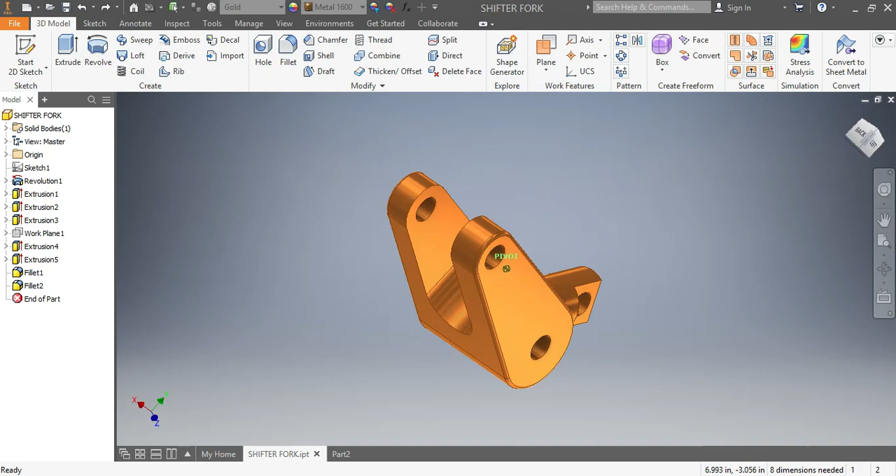Today you're going to have to draw this shifter fork that you are seeing in front of you. Our dimensions are in inches.

What I'm going to do is go on New, come to English standard inches, and go to Create. Don't worry about this message, I've been going through it a lot.

Then I'm going to start with some lines for guidance. I'm going to choose a drawing plane that is YZ. So once I'm in here, I'll put that one there. This is my drawing plane, my line for guidance.

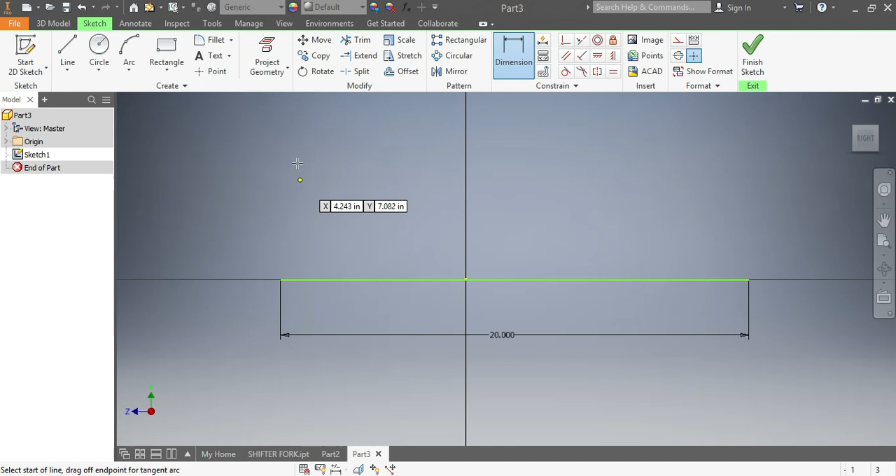I want this one here to be let's say 20 inches. Don't worry about those dimensions though, but they're going to help me a lot anyway. Then I'm going to go for the other line. Okay, that is my line.

The next thing that I want, I need this line here to be 45 degrees above this horizontal line. So that needs to be 45 degrees.

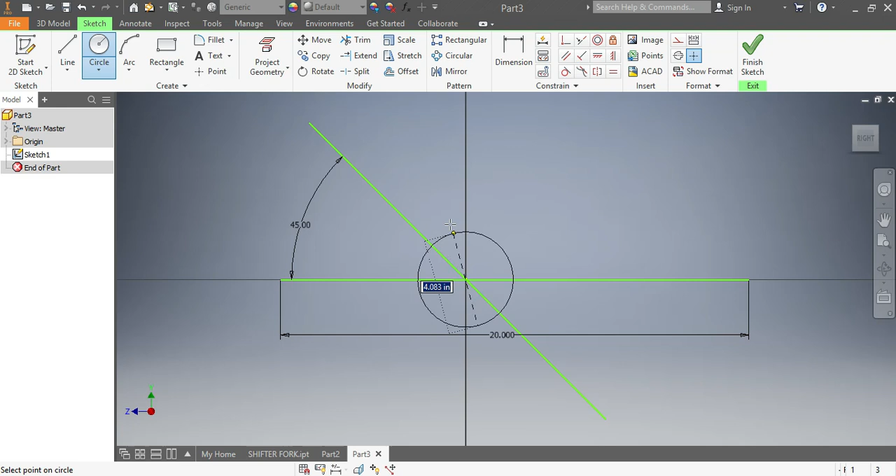Once I have that in place, I'm going to go for circles. So that's my first one. This is my second, that's my third. And then I'm going to come on this side as well.

1 and 2. So I want from here up to here to be, as per my sketch, 6.5 inches. And again I want this one here to be 2 inches.

That needs to be 2 inches, and this one needs to be 1 inch. This side as well, so that one needs to be 1 inch. The following one needs to be 1.5 inches, and the third one needs to be

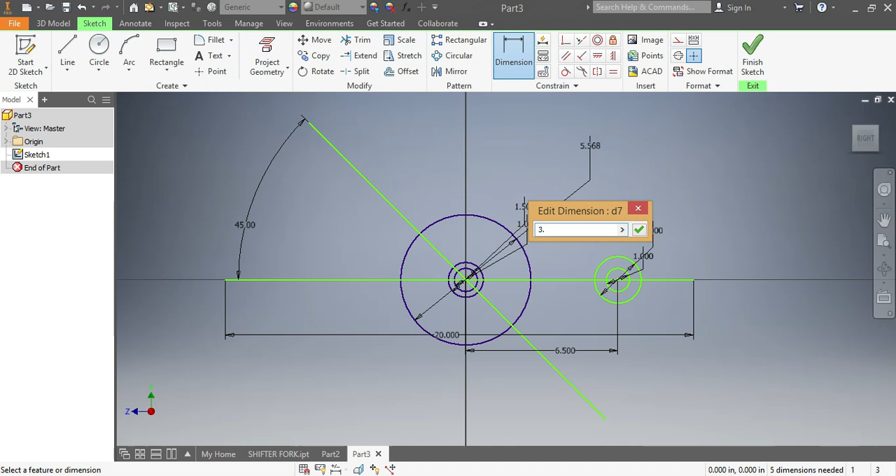3.5 inches. So after this I'm going to go for these lines here. So that is my first line, and this is my second line.

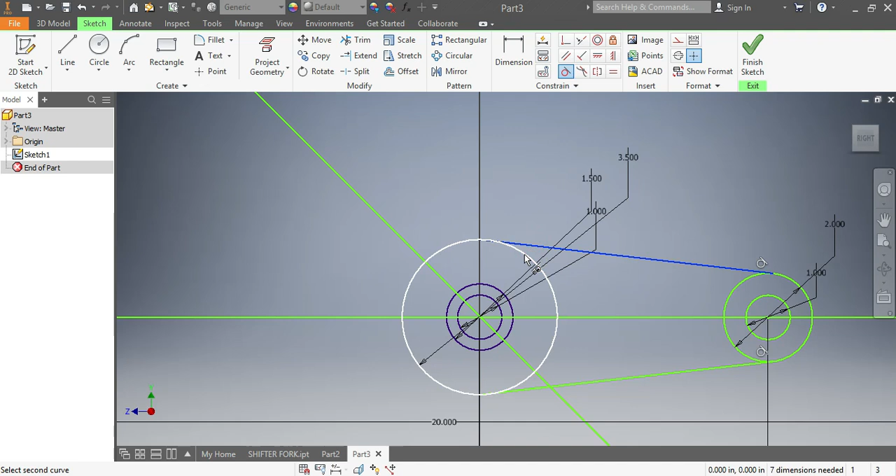Now I want this line to be tangent to that one. This line needs to be tangent to that one. That needs to be tangent to that one, and those need to be tangent to that one.

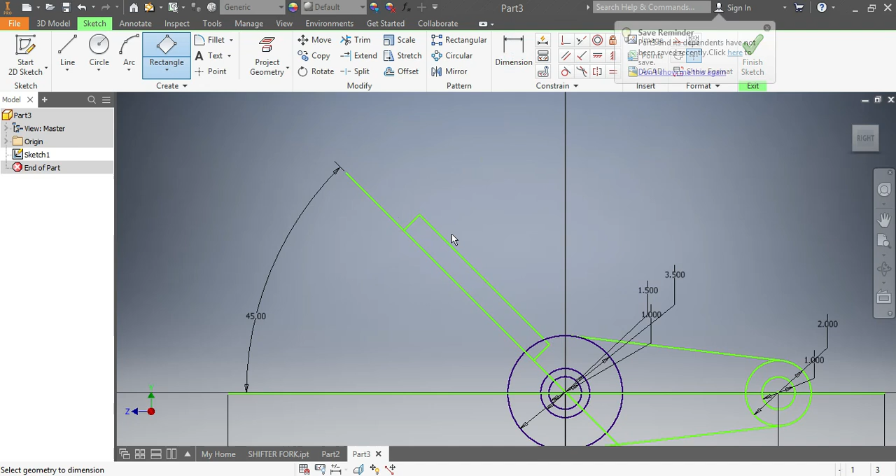Once I'm satisfied with that, I'm going to come here and choose a rectangle. So that rectangle will be fine for me. The rectangle needs to go from there up to here. There is my rectangle, and I want this rectangle, from there up to there, to be 1 inch.

That is 1 inch. It's fine there. And I want now from there up to here to be... I can give it 3.8 inches, as long as it's about this, the circle there, with 3 inches. That's all I want.

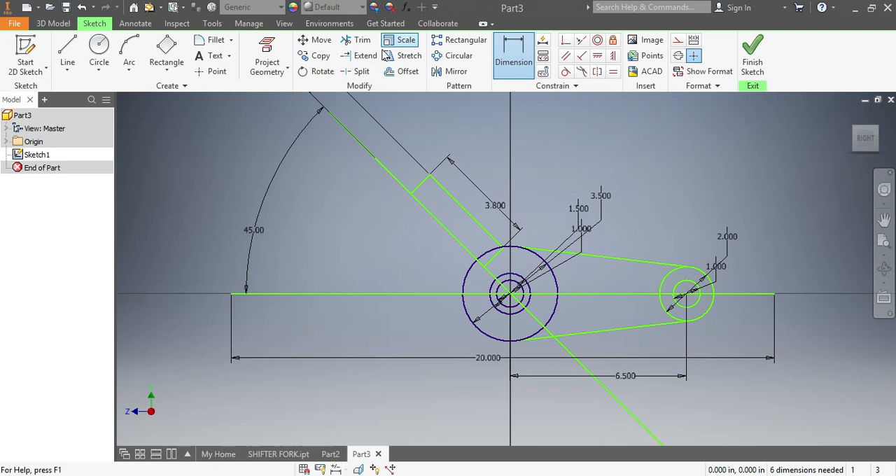Then I go for Trim to remove all the parts that I don't need on my sketch. So I'm going to remove that part, remove this one here, remove that one, remove that one, remove this one. Once I'm done with those, I'm going to go for the 3D model.

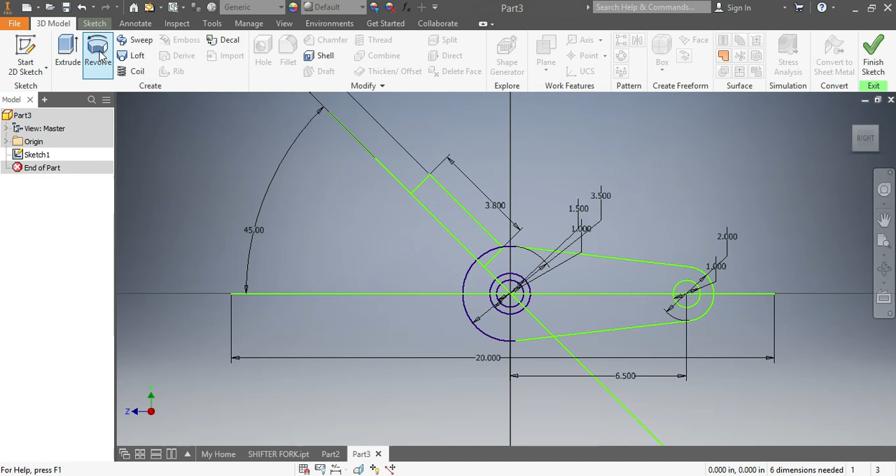I think that's it. I'm going to go for a 3D model, I'm going to go with Revolve. So here I want to revolve this part against this axis. Then I say okay, then I come again and go to Revolve there.

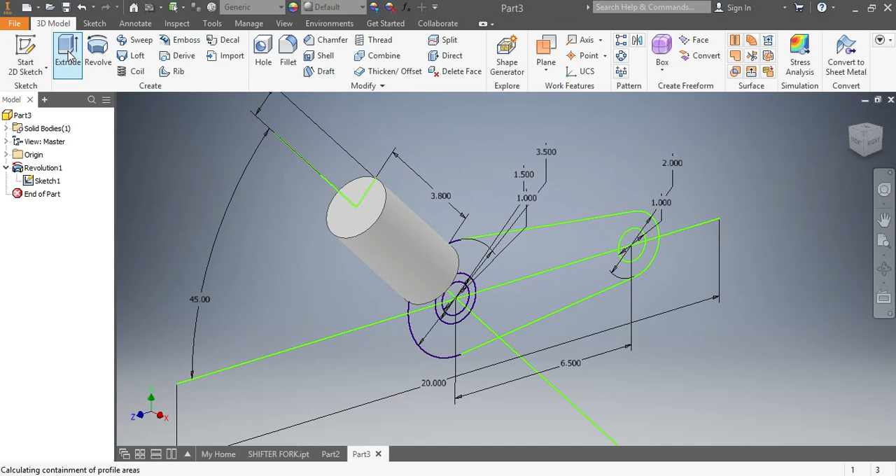I save, sketch visibility on. Once the visibility is on, I need to give dimensions like you can see there. So I come back here again, I go on 3D Model, I say Extrude. I'm going to extrude this part here according to my sketch by 4.

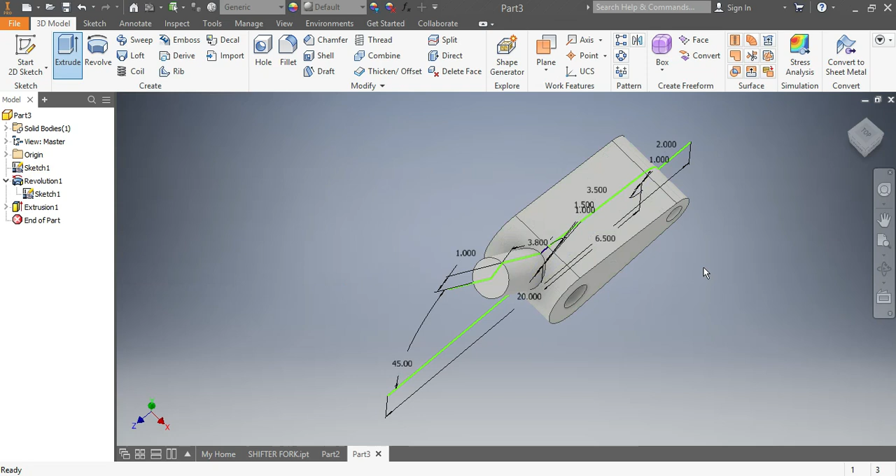It's 4 point what? 4.5. So that needs to be 4.5, but both sides, like that, both sides of that line. Then I say okay. So once I have that one, I'm going to come here again and say extrude again.

I'm going to extrude this part inside here. If you see properly here, you can see that there's a step there, that step that you're seeing there. Then I'm going to make sure that I have it on this side as well.

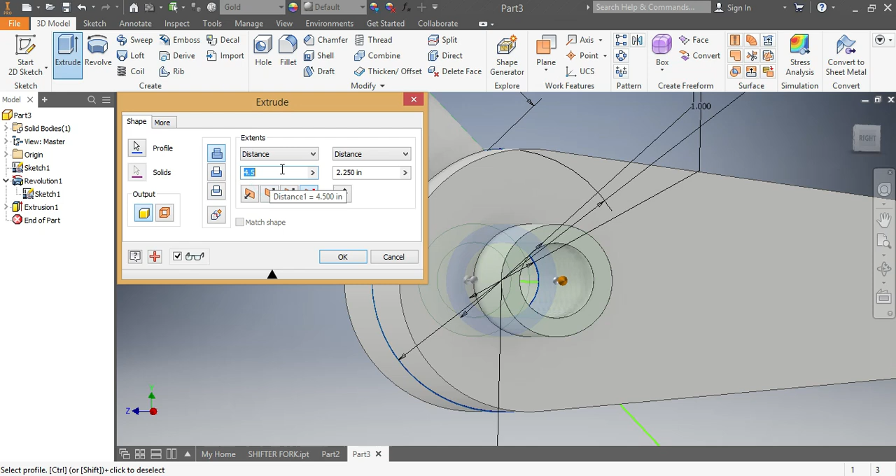So I'll come here, then that is fine with me, but this side is the one that I need to work on. So there, come on. So that one needs to be 1.65. That's it, yeah, 65, that's all I needed. Then I say okay, like that.

Alright, the next step that I need now, I'm going to come up here, check here, I'm going to come there, click on it, say New Sketch. So once I'm here, I'll come with a rectangle. Okay, I need a rectangle. So there is my rectangle.

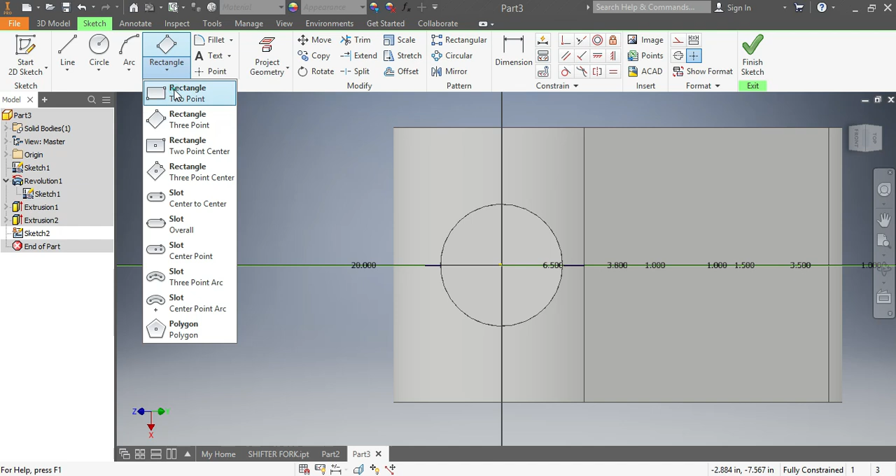Then I want this rectangle to come like this. So there is my rectangle, alright? And this one here, I need it to be, to avoid confusion, that needs to be 2 inches. And since 2 inches from there up to there, that needs to be 1 inch.

Okay, I think something moved there, but it's not a big issue, so that is fine with me. And then I'll come here and draw this rectangle.

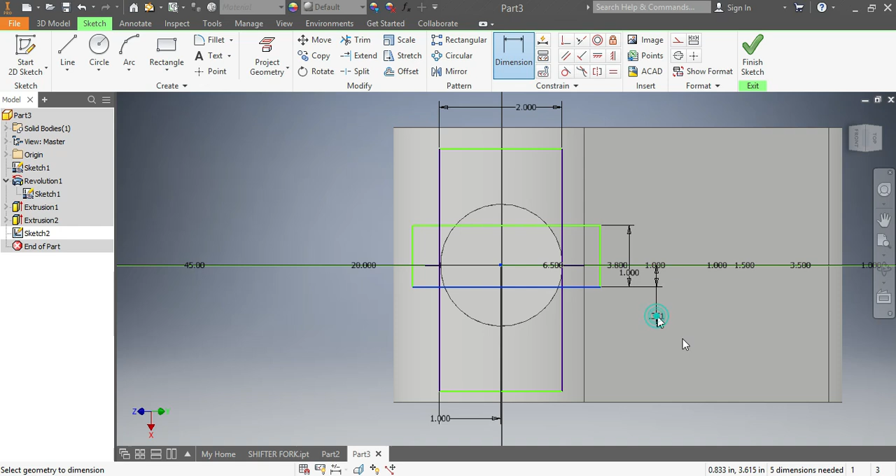So as per this rectangle, that one needs to be 1 inch, and from there up to there, it needs to be 0.5 inch. Okay, once I'm satisfied with that, I'm gonna come here and trim the spot here, that and that, this and that. I can just delete that one.

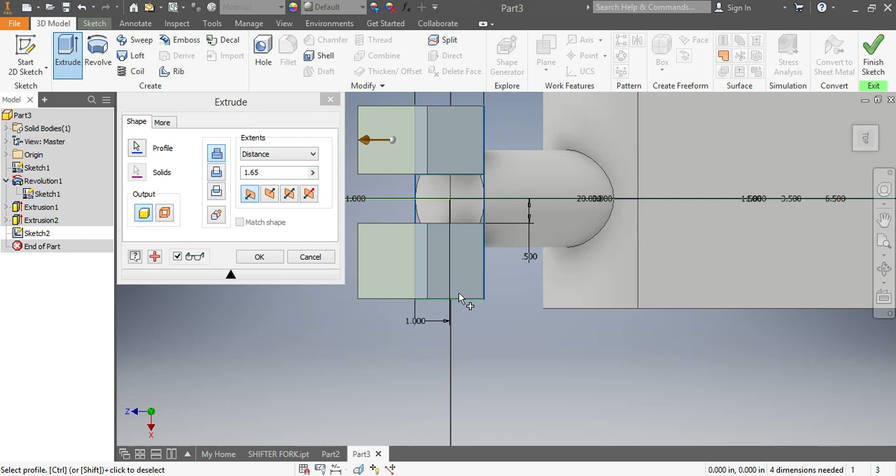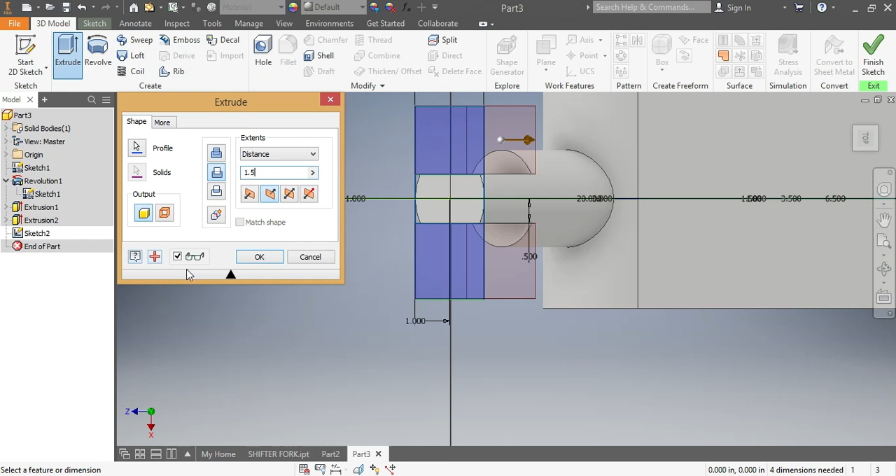Then I'm gonna go for a 3D model, I say extrude. I want to cut the spot here and that spot there so it can go down. I want to cut it according to my sketch by... 0.75. Okay, no, I made a mistake. That's not 0.75, it needs to be 1.5. Sorry, 1.5, alright, then I say okay. So that is done there.

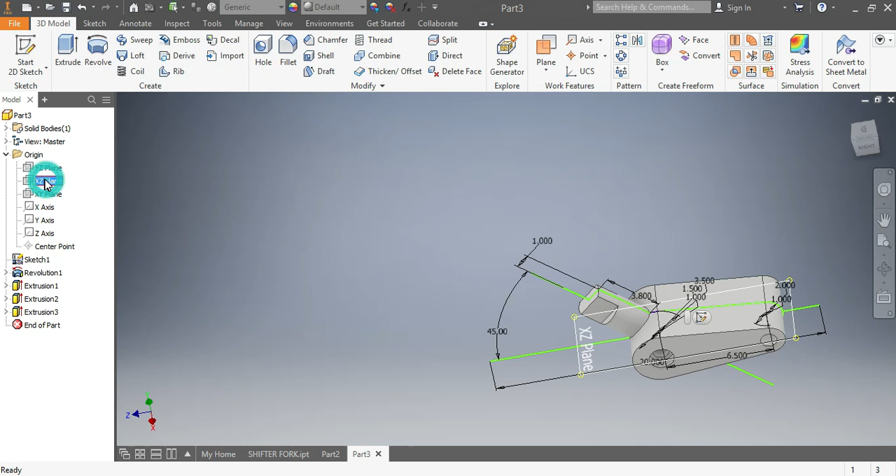Okay, the next thing that I need is this spot here. So I'm gonna come back here. This needs to be done on which plane? So it's xz, sorry. I'm gonna click on xz there, then I go on plane. I try to punch it, but I want it to be at 0, so 0.0, so it needs to go back there. I say okay. Then I come there by the corner, I say new sketch. Once it gives me that, I come by the corner again. I say slice graphics.

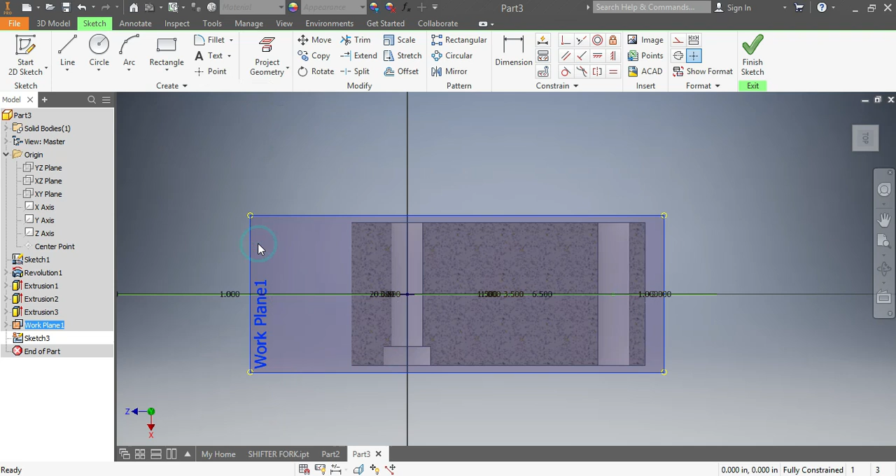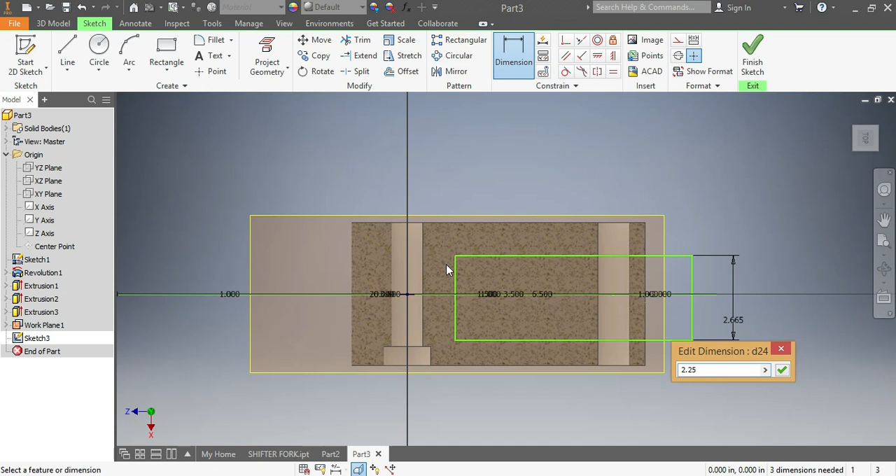Once I have that one there, then I'm gonna start with this. So I'm gonna draw this rectangle here. Doesn't matter how far it can go, but this one here needs to be 2.25, sorry for that, so 2.25, which means...

Sorry for that, from there up to there, that needs to be 1.25, was it? Is it 1.25 or 1.75? 1.175, that is the correct answer. So 1.175, and now according to my drawing, from that spot to there, that needs to be 2.5. So that needs to be 2.5, okay, that needs to be 2.5.

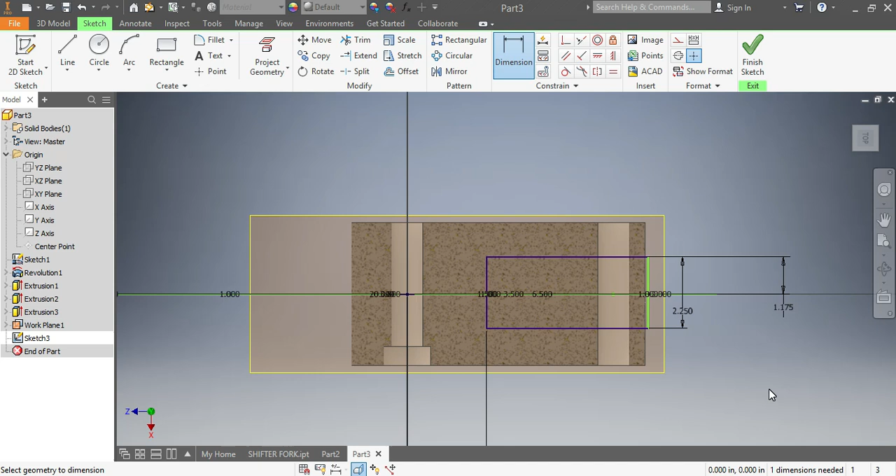Okay, and I'm gonna go and do this. I go there, then I come here. So that's great. I go for escape, and then I trim this spot here, so I trim that spot. So I'm done with that.

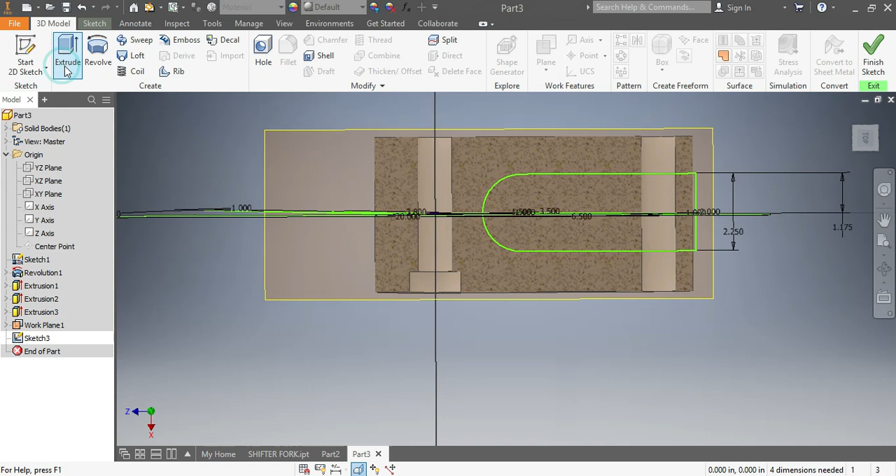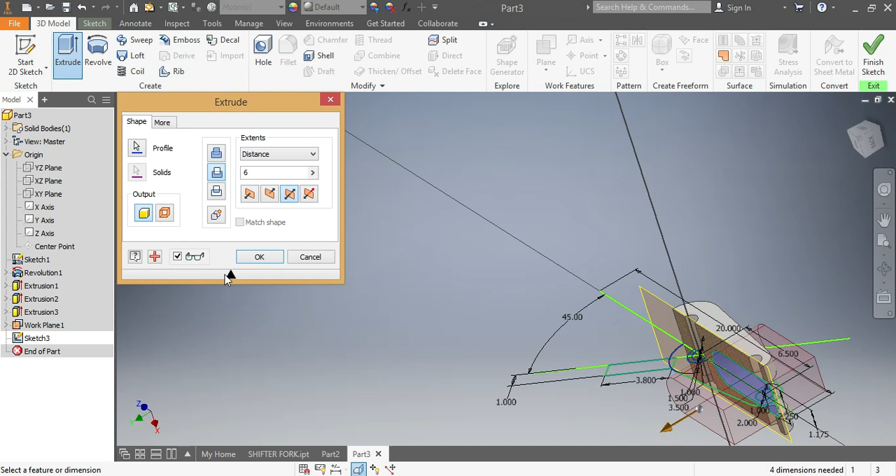Then I'm gonna say 3D model, extrude. So I need to extrude this part here. There we go, check here, like that. So I'm gonna go cut it. I can go as far as I want, I can go with 6 inches, but need to go not only one side but this side as well. So I'm gonna go there and say up and down, then I say okay.

So once that is done, you can see now how my drawing looks like. Okay, so now I need to come here. I can come here and say new sketch. So once I'm there, I'm gonna go for the circle, and the circle here needs to be 1 inch, right? Yeah, the circle needs to be 1 inch. Sorry, the diameter needs to be 1 inch, so that needs to be 1 inch.

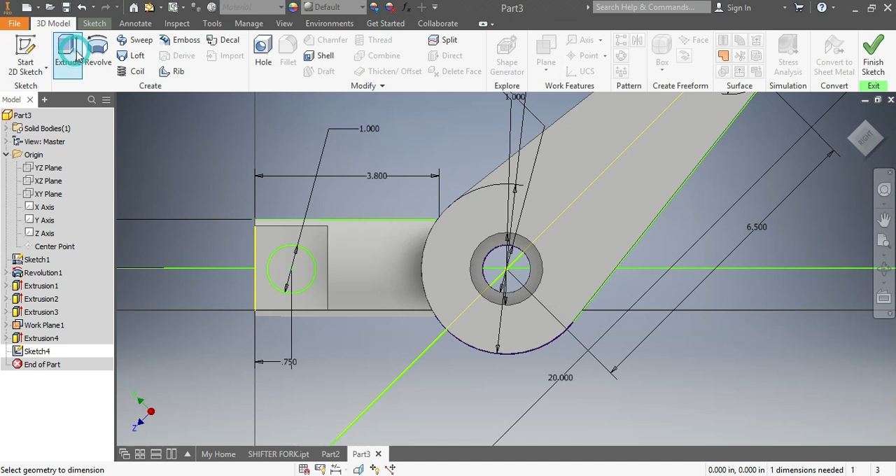Alright, and from there up to there, that needs to be 0.75. Alright, then I go on 3D model, I say extrude. I'm gonna cut that support there. 6 inches is fine for me, so both sides like that. Then I say okay. Alright, then I'll come here to make my drawing look beautiful. I'm gonna say visibility removed, and then I want to remove that drawing plane. Then I'll go here and say visibility off.

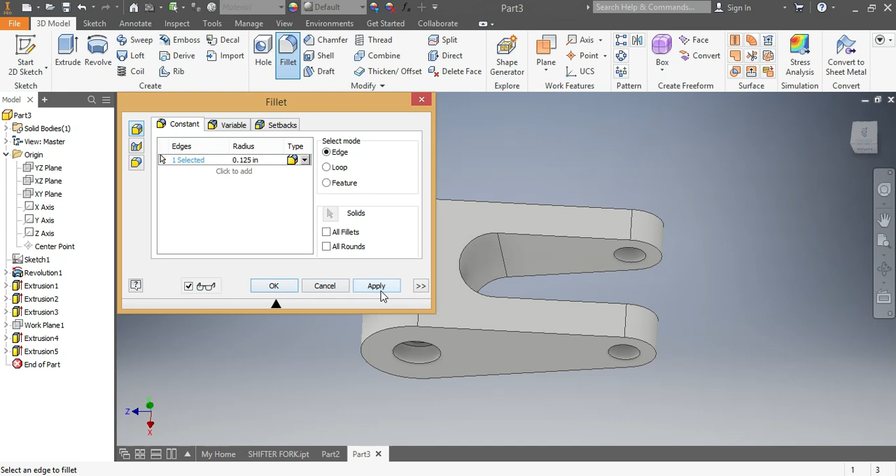Okay, so once that is done, I'm gonna have to fill the corners. Okay, so first I'll start here. I'll click there and then I click on the fillet. So that one is fine for me, 0.125 inches, I'll say apply. Okay, it's applied there already.

Then I'll select that one, press Control, select spot. Okay, I'll try to turn my drawing, select that spot, select this spot as well, turn it again, select that spot, select that spot, select this spot, and then turn it, select this spot here. Then I click on the fillet, then 0.125, fine with me.

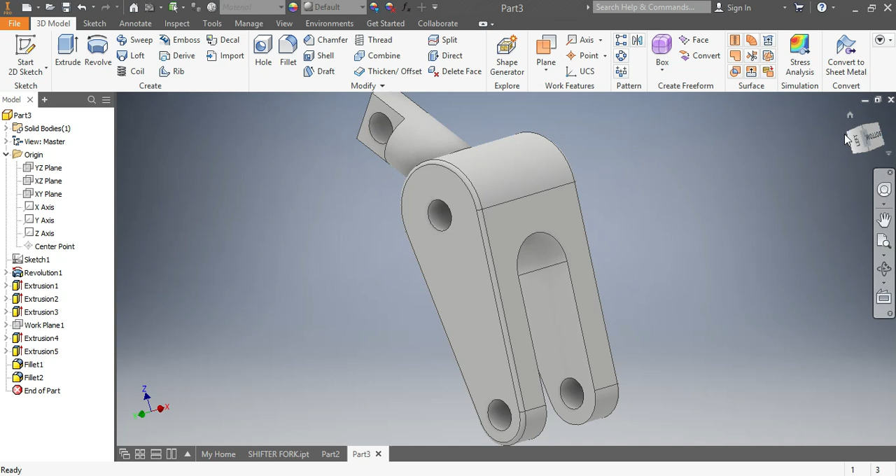Great, so now check out how your drawing looks like. Right, so everything is there, all the parts.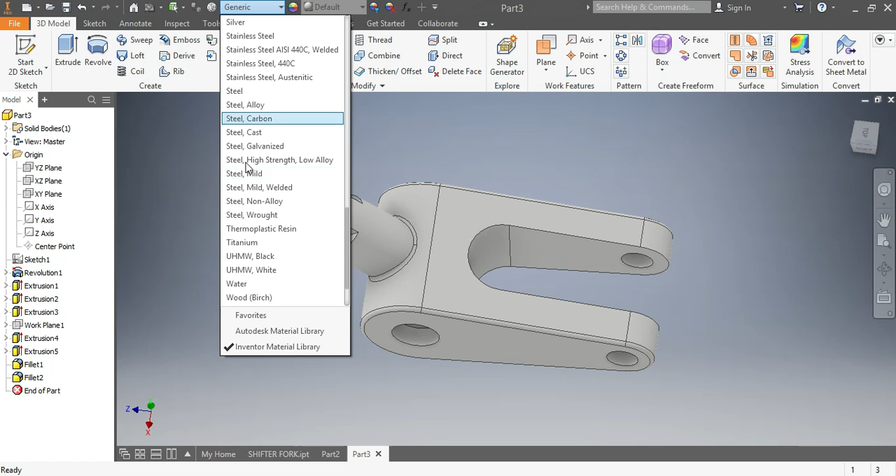So the next thing that I want now is to give the material, just the same. You just made your shifter fork, right? So now let's give it the material. So this one here, I'm a fan of gold, so I think I'm gonna go with gold. Where's gold here? You can go with stainless steel. Let's go for stainless steel. Where's stainless steel here? Stainless steel, yeah, that's beautiful though. That's also fine, but let's give it something expensive.